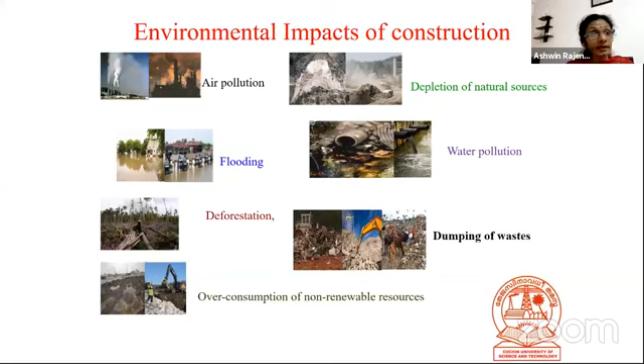So we know construction activities are really depleting our natural resources. So how can we connect sustainable development and construction activities? In other words, how can we make construction sustainable? When we know the implications of the cement industry, we need cement for all activities.

Actually, this cement, without cement, I could say it is a mandatory material for all types of activities. But the impacts of cement manufacture in construction is severe. So whenever we think about sustainable construction practices, the first point is we should be able to remove cement from the construction material. But can we think about that?

Without concrete, how can we construct? How will we be able to develop, how will we be able to proceed with infrastructure development without cement? We won't be able to think about that. But now the situation is like that, we have to think in that way. We need to think about research activities which can help us in eliminating cement or finding an alternative for cement. So that's the case with cement.

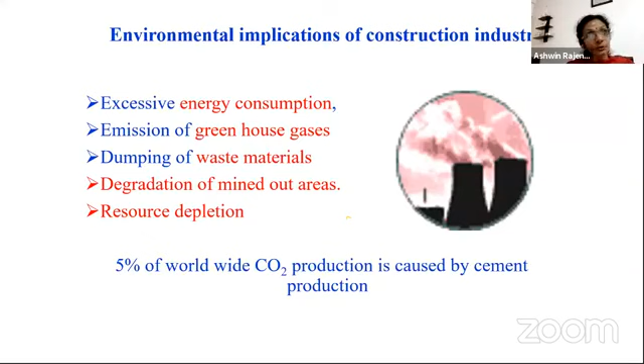Aggregates also the same thing. So we need to think about alternative materials. Then only we can achieve the objective of sustainable development.

We all know the basic meaning of sustainable development. The basic definition, even from childhood we are listening to this word sustainable development. Everyone is talking about sustainable development, and related to that, the green building concept also. Yesterday sir was saying the same thing. Are the green buildings sustainable? That's a big question, because whenever everyone talks about sustainable development, the next sentence is, oh, we need to practice green buildings. But we need to think...

...change our perspective with respect to the concept of green buildings. First I'll talk about sustainable buildings, then maybe we can talk a little bit about green buildings also. Sustainable development is actually a 3P concept: people, planet, and profit.

Whatever development we are doing, it is for the people, for the benefit of the people. So we have to think about the socio-cultural backgrounds of the people. Based on the socio-cultural backgrounds, only our needs are developed. So people is the first thing. Based on the interest of the people, everyone is doing development activities. Everywhere construction activities are going on. So first the aspect is people.

And the second aspect is we need to think about the environment. What is the significance of the environment? Whatever we need, we are achieving it. At the same time, our future generation should also be able to meet their needs. So whatever development activity we are doing, we have to think about the environment, to preserve the resources without creating any impacts on it, and preserve these resources for our future generations.

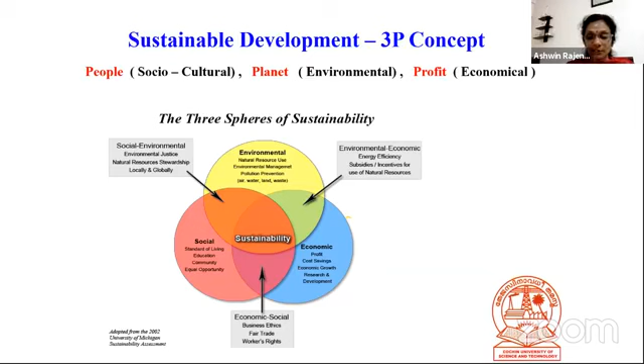Then what about our construction activities? How are construction activities related to sustainable development? Construction activities, anyway, we need resources. So we have to think about whatever construction we are doing, we should be able to reduce the implications of the construction without utilizing the resources. We won't be able to say like that, minimizing the usage of resources.

Based on the concept of sustainable development, we can give a definition for sustainable construction. Along with the case of sustainable development, one more P is added: people, planet, profit, and one more P. Maybe we can consider it as project. Project means actually technological options. Construction needs technology. So the fourth P corresponds to the technological option.

So we can see the definition. Sustainable construction is a technological practice that involves the effective utilization of local manpower and indigenous methods. Local manpower and indigenous methods definitely connect with people and technology, and also local resources, utilizing renewable resources and waste materials. There comes the significance of the planet, with minimum infrastructure and feasible technological options. Again, that feasibility corresponds to profit, economical, affordable options. So all 4 P's are related to this concept of sustainable construction.

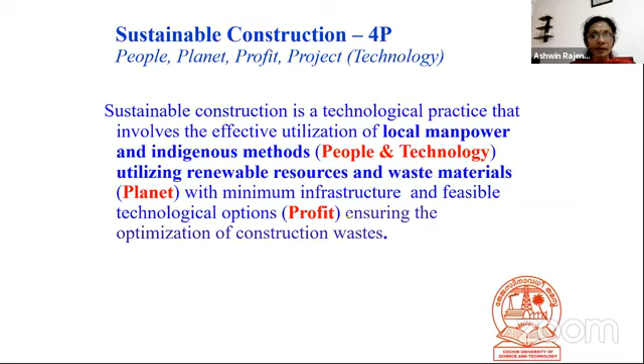If we understand the concept of sustainable construction, we should be able to evaluate present practices with respect to this concept. So how can we evaluate? In this presentation, I won't be able to show the entire evaluation, but I'll show you the results of evaluation of construction practices in Kerala.

For this evaluation, we have made a kind of framework, known as a simple conceptual framework for the evaluation. Our main objective is achieving sustainable construction, so for that we have sub-objectives, the 4 P's. Each P is related to each aspect of sustainability.

Socio-cultural aspects are based on the interest of the people. With respect to socio-cultural aspects, if we propose a particular technological option, how can we adopt that? I should have awareness about the technology, and based on that awareness, acceptance for the technological option will develop. So acceptance and awareness are important factors with respect to the socio-cultural sustainability of construction. Also, it should enable self-help or decentralized production.

For example, if I give you a technological option and say this is environment friendly and cost effective, you can adopt it. But if you are not able to access infrastructure facilities and implement that technology by your own, then that particular technology won't be sustainable. So enabling self-help is important, along with infrastructure facility, which adds to the economic sustainability of the technological option. Labor requirement and material requirement also contribute to economic sustainability.

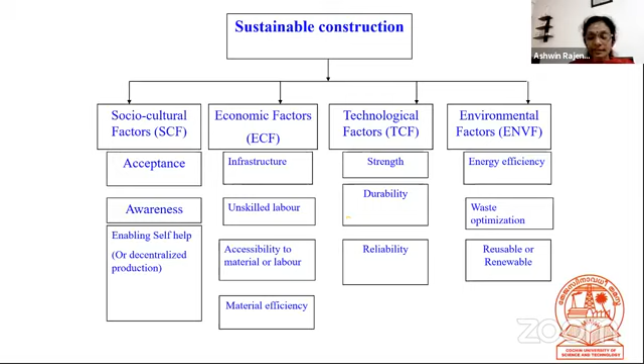This was part of a study I did very early, in 2006, during my PhD. I'll just show the results of the options. Now coming to construction practices in Kerala, we can start from the very early stage: traditional construction, the age-old traditional construction in Kerala that we all know.

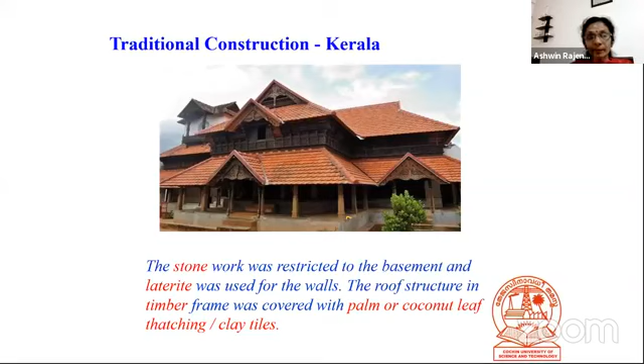But we are not sure why this technological practice is not popular even nowadays. After how many years? After the 80s, means 40 years later, now I don't think that many of us are practicing this. Even Kerala State Nirmithi Kendra, they are also not practicing it very much. What are the reasons behind the failure of this technology?

So the CEF technology options are basic characteristics characterized by exposed brickworks, usually rat-trap bond or Flemish bond, filler slab roof, precast lintels. Instead of conventional openings, they have jolly works, corbelled arches, and natural ventilation in the room is facilitated through honeycomb brickwork. So this is the basic characteristic of a CEF technological option.

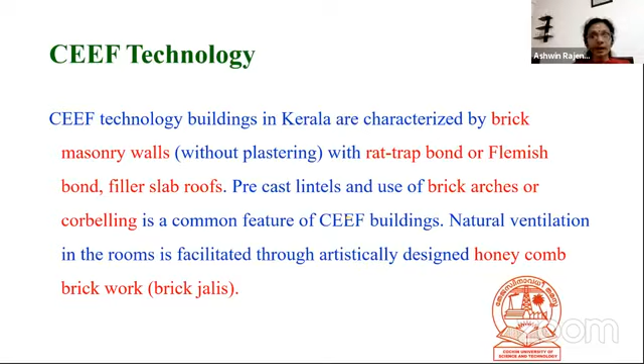And we have many CEEF technological buildings around us also, but nowadays it's very difficult to see new construction like this. These are all earlier constructions. In public buildings, residential buildings, school buildings, everywhere we used to see this in the 80s and 90s. But nowadays, I don't think it's that popular. So these are some examples.

Why are we not able to accept such a technology, even though there is aesthetic appearance, even though there is cost-effectiveness and environment-friendliness in the sense that we are able to reduce the usage of resources? But still, why is the acceptance part or the awareness part lacking? We need to do a search on that. We should actually need to overcome all the drawbacks, and we should be able to propose sustainable options.

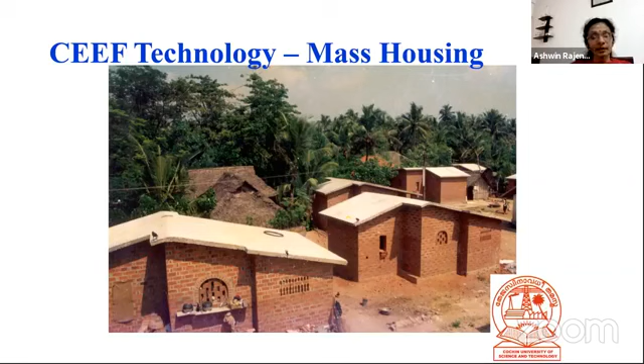CEEF technology, one more public building. Mass housing also - Nirmithi Kendra was able to construct and propagate many projects in all these areas.

Now we can see what are the, maybe we'll be able to do an evaluation of the CEEF technological options against, I would say, traditional construction and conventional construction. Actually, I'm doing it together because nowadays we won't be able to see any traditional type of construction. What we see at present around us are only conventional options. So we'll do it together: CEEF technological option versus conventional or traditional technological options.

What are the advantages of this CEEF technology? From the name itself it is clear: cost-effective and environment-friendly technology. So in the 4P concept of sustainable technological options, we can take two terms: economy and environment. Definitely both of these options, technology is the common factor. Technological, so we can assume that strength and durability characteristics are there. Actually, it is there - even in CEEF technology and traditional or conventional technological options, all these are accepted by the standards.

So basic strength and durability characteristics are there. So we need to conduct an evaluation based on other pieces, like economical aspects and environmental aspects. Actually, with respect to CEEF technology, the main objective of the technology is on those two pieces only: economy and environment. But with respect to the traditional conventional options, the main advantage is accessibility. Whatever material we need with respect to this conventional option, we can directly go to the market and approach it. It is easily accessible - that is the basic advantage of conventional options.

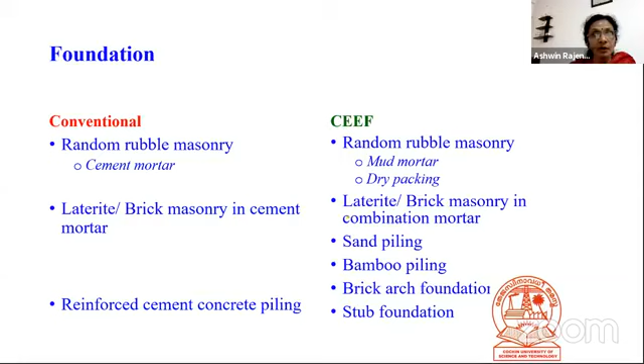Another option in CEEF technology is ground improvement techniques. Rather than going for deep foundations, we can go for ground improvement techniques and adopt feasible technological options that are environment friendly.

This is with bamboo, how they are utilizing bamboo for ground improvement.

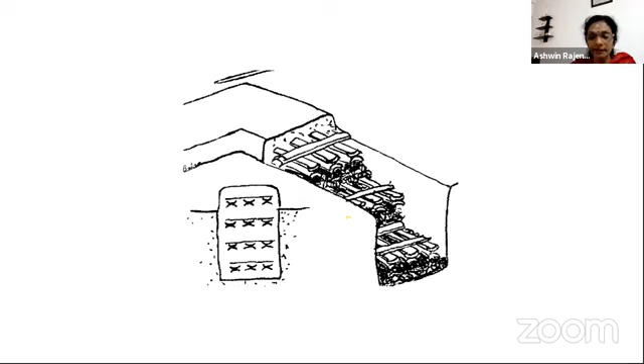Now coming to the case of the superstructure. Under superstructure we have the walls, openings, lintel, beam, sunshade, everything. Conventionally or traditionally, whatever was locally available was our concept in traditional construction. That's the reason in traditional construction mostly we were using timber or laterite. In our traditional Nalukettu, Ettukettu, we could see timber, wooden type of construction.

But conventionally around us, what we see now are bricks and concrete blocks. Laterite is also a naturally available material; we are cutting the laterite blocks from the surroundings. But laterite is not used much nowadays because of its inferior weathering resistance. That's an issue related with laterite. Laterite was used in our traditional construction too, but mostly nowadays around us, the conventional practice is using concrete blocks and bricks, the common burnt clay bricks.

But what about CEEF technology? Actually, CEEF technology options are proposed, especially for walls, with the objective of improving the traditional options we were practicing in olden days, like mud blocks. Mud blocks are an improvement of adobe - stabilized mud blocks, I should say, not simply mud blocks. Stabilizing the mud blocks for improving their characteristics.

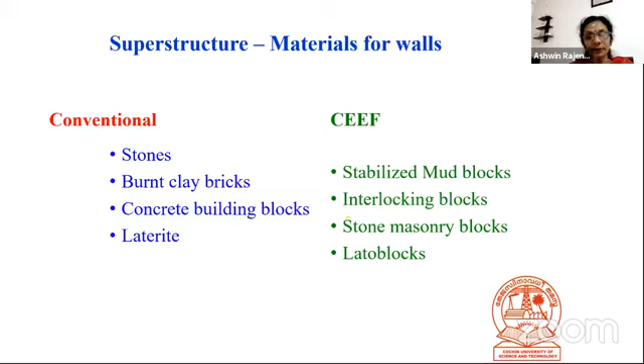Engineering students, technical students and other academicians - we are academicians, we are not able to practice it. But other stakeholders, why are they not using it? We have to see some changes in the policy.

Now coming to the walls - first we discussed about the foundation, then under the superstructure we were discussing about the masonry units. Now with respect to the bonding, conventionally we use - when we look around, they are using brick masonry plastered on both sides, and for that plastering we use English bond with cement plastering.

But for CEEF technology options, if they are going for brick, they use either Flemish bond with cement pointing where plastering is avoided, or rat-trap bond. Actually this rat-trap bond and Flemish bond, when we compare the labor requirement with respect to skilled labor, it is a bit higher compared with the English bond.

So that can be a reason for the low acceptance or inferiority of - I don't know what should I say - maybe for propagating this, it can be considered as the main hindrance in propagating this type of technology, even though the exposed brickwork has such a good appearance. Why are people not adopting it? We have to think about that.

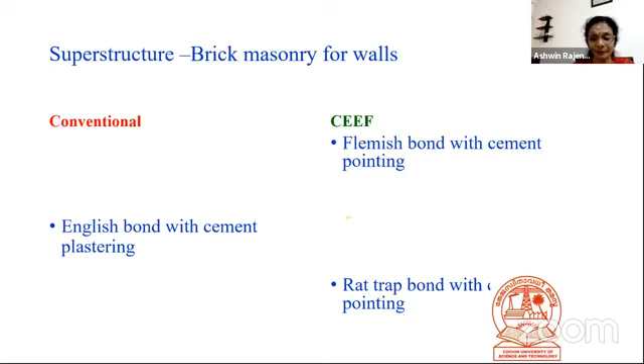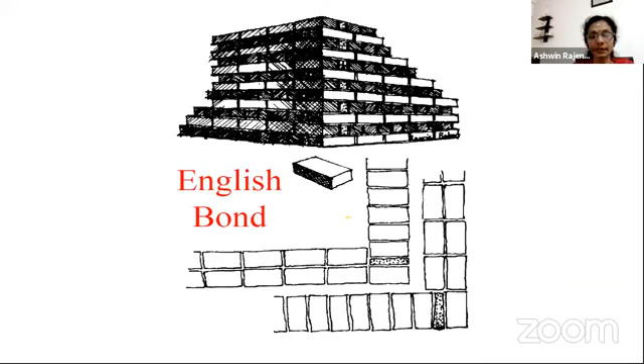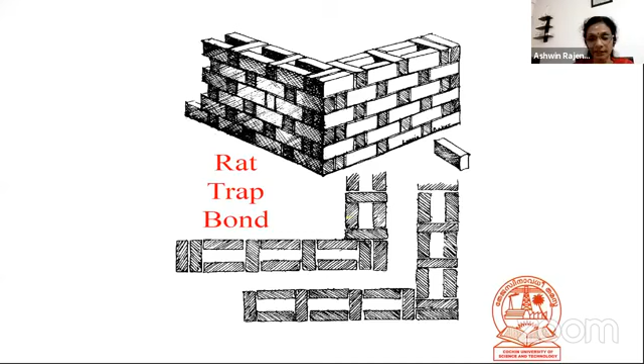Rat trap bond construction - I don't think I need to explain it since most of you know about these technological options. Just showing it to get an idea about the results. We did an evaluation, I'll show you the results.

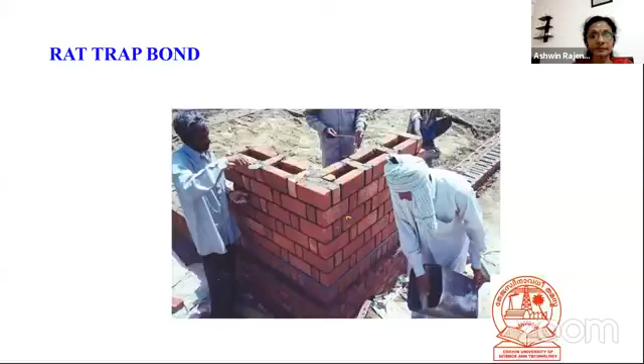Under superstructure, we have the next element - lintel beams. Usually in conventional options, we go for lintels. Traditionally we were using stone lintels, wooden lintels, all those things - traditionally we could see it in palaces and temples. But nowadays we can only think about RCC lintels throughout the building - we construct it around the walls, we only use RCC lintels.

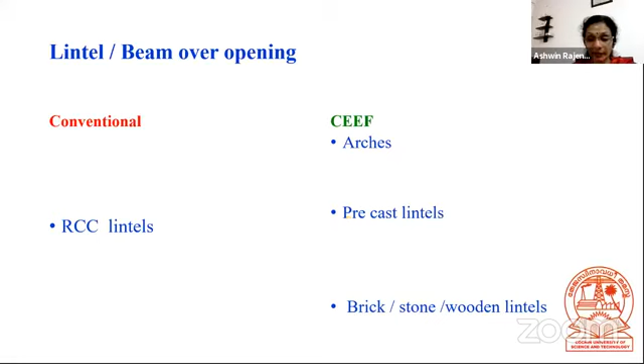But CEEF technology options use arches, precast lintels, and they also use stone lintels or wooden lintels as earlier used in traditional buildings. This is a corbelled arch - these are pictures of different types of arches. The aesthetic appearance of the arches is very good compared with RCC lintels.

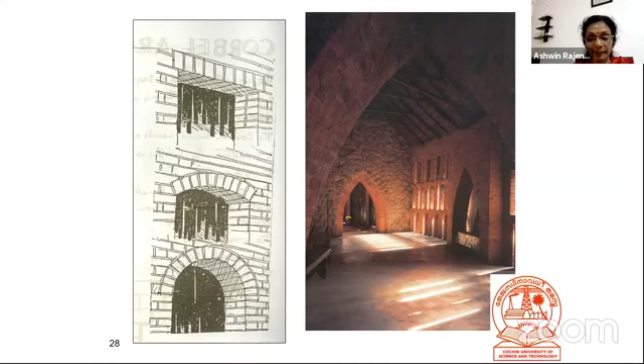Material efficiency is there - in the case of normal lintels we need to use steel reinforcements, but in this case we don't need it. Comparing material requirement, energy requirement, embodied energy of materials, especially with respect to material efficiency, arches are the sustainable option. But the problem is with labor requirement - it is very high compared with the other option.

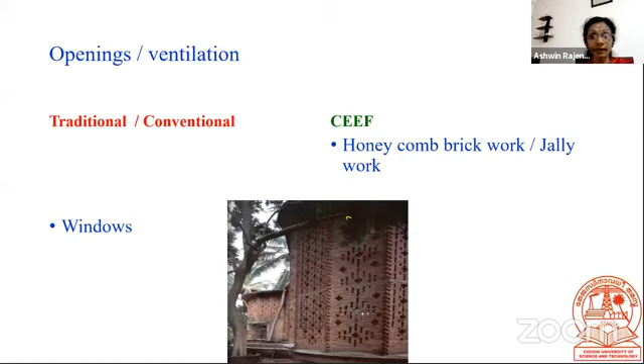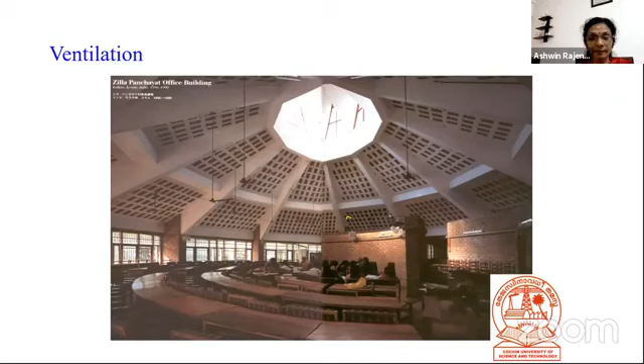Now coming to ventilation - openings and ventilation. Usually for openings we go for normal types of windows, but this is a peculiarity of CEEF buildings - we can see honeycomb brickwork, jali work for natural ventilation. This is a picture where we can see the natural ventilation, how it is provided - this is a picture from the CEEF technology building.

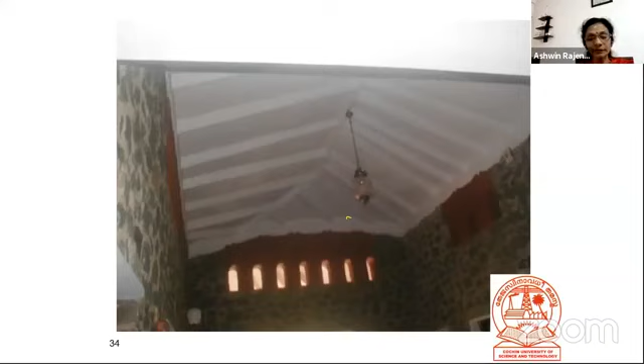And here also there's an auditorium, showing how they get natural ventilation utilizing this honeycomb brickwork or jali works. Yesterday's presentation also showed pictures of different types of jali works. This is also a picture from a residential building showing how they get natural ventilation.

Now coming to the roofing. In roofing option, we have only one option when we think about the material. If we see the census reports, we can see the practice of materials changing every 10 years.

We won't be able to see any thatched roof or even tile roof in the recent census report. In early days, most buildings used only tile roof, but now, if you are able to see a tile roof at all, the tiles are just placed over RCC roofing to get that aesthetic appearance or to protect it from leakage. That's why tile roofing is provided now. Otherwise, everyone is going for RCC roofing.

So you can imagine how much wastage of material is there. We are utilizing reinforced cement concrete for the roofing, and over the RCC roofing, we are again placing tiles - how much material is wasted in that case. But in our traditional construction, we were using timber frames, and over the timber frames, we were using tile roofing.

I'm not arguing for going back to those olden days where we need to use palm leaves or thatch roofs. I'm not saying like that. We have to think about alternative options that can reduce these environmental implications of resource depletion.

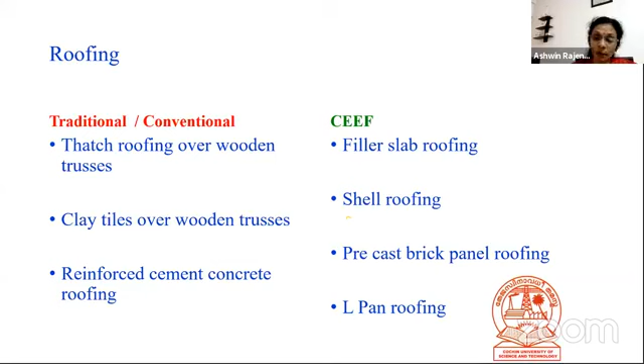In the case of CEEF technology, we have filler slab roofing, shell roofing, precast brick panel roofing, and L-pan roofing. Most of you may be aware of filler slab roofing, but what about the other options? All these technological options are already proven, but still we are not using them.

This is a filler slab roofing. Below the neutral axis, the concrete is actually not required - in that position we have only tensile stress, and we provide reinforcement to take the tensile stress. In that case, the concrete is only acting as a filler material. So we can replace the filler material by utilizing any locally available material.

Most commonly, most popularly, we used to see Mangalore pattern tiles placed in such a way that an air gap is created between two tiles, creating thermal comfort inside the building. Instead of these MP tiles, we can use coconut shells.

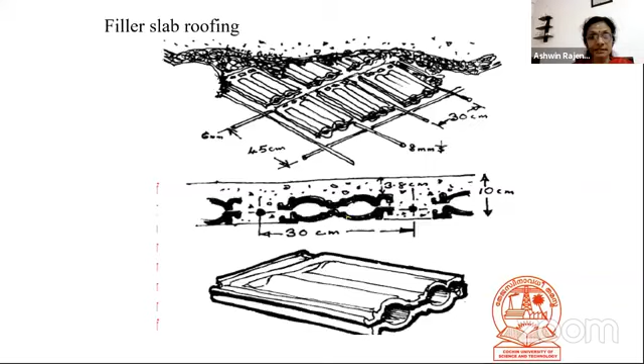In yesterday's presentation, we have seen the stabilized mud blocks made for use as filler material for slabs also. So we have many options that can be utilized. I should say that we should go for locally available options if we are thinking about environment friendliness and sustainability. This also is a picture of roofing.

I hope I was able to cover all the technological options. Actually, these options I had shown just before showing the results.

We are actually evaluating the technology with respect to 4 P's, like people - socio-cultural factors, interest of the people, acceptance of the people, awareness. If I'm interested about a particular technology, then only I will accept it. If I have awareness of a particular option, then only I'll buy that one.

For example, our mobile phone also - we have many options around us. Before buying a particular phone, we should check all the specifications and all those things; without that, we won't adopt it. The same thing applies with respect to our construction technology also.

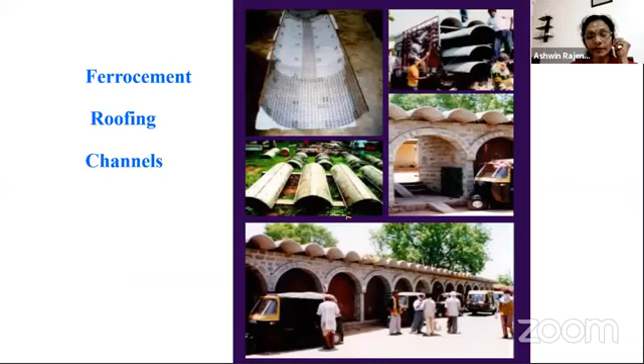In this case, we don't have much options available for getting awareness on these technological options, even though they are available. I should say policy intervention should come for propagating this technological option. Before going to the results, I'll show one more evaluation. Under roofing option, ferrocement roofing channels are also an innovative option.

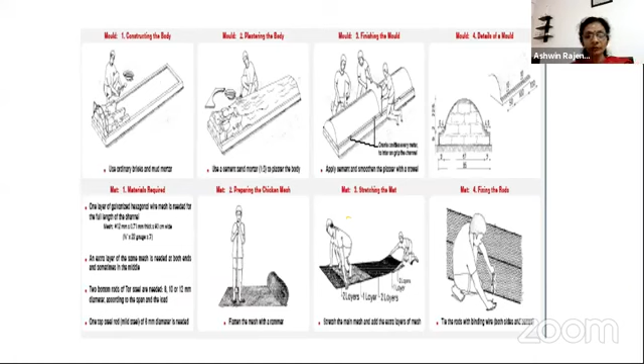Maybe I'll just explain with this. Some more slides are actually missing in this. Before coming to this slide, I need to show you one more slide regarding the evaluation of the technology based on embodied energy also. Actually, those slides are missing. Unfortunately, I had some issue with my system and I changed it, and this is my son's system, so I think it's a different presentation.

Yeah, anyway, I'll proceed with this.

With respect to the evaluation, why do CEEF technology options fail? What are the reasons for the failure? From the evaluation, we could understand that it is the poor acceptance among the public. That means when we compare the 4 P's: socio-cultural aspects, economy aspects, environmental aspects, and technology.

Economy and environment, those are the basic concepts of CEEF technology options. With respect to technology, it is already proven in strength and durability. But who should accept that? The public, they don't have any awareness about this new technological option introduced.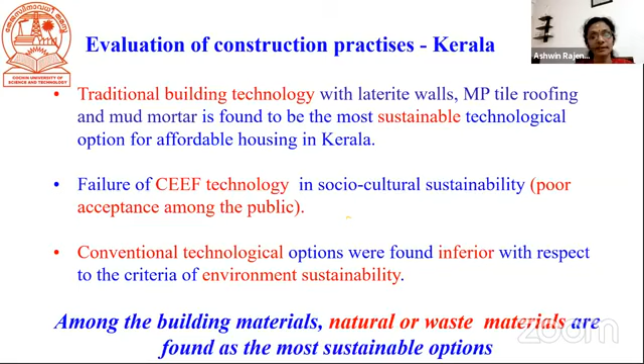So there are some options based on this evaluation under building blocks or masonry units. When we think about natural materials or waste materials, we need researchers helping to propagate this technology. Bamboo construction is there, and there are many researchers working on it. The only thing is that we should be able to propagate this technology.

Under mud construction, we have the traditional options. What we need to do at present is work further on this mud construction technology to improve its durability characteristics.

And another innovative option is straw bale technology. I'll come to that in detail. In the coming slides, I'll show the works of some of my students who are actually working on this. And concrete building blocks, that is the popular option available around us.

When we think about the construction of a building, the first option coming for wall is brick. If we want to reduce the cost, the next option is concrete blocks. So around us, whenever we think about constructing a building with the concept of reducing cost, naturally we go for concrete block construction.

But the inferiority of concrete blocks is that there is competition among manufacturers, so they want to reduce the cost. How can they reduce the cost? They will reduce the content of cement. Naturally, the quality is less, and they are not sure about the codes.

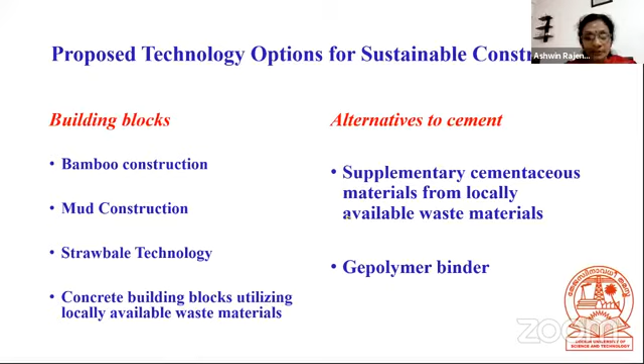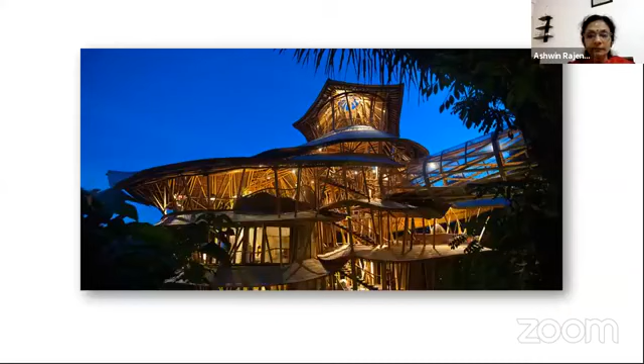This picture shows how it can be utilized for the walls. And this also shows different applications of bamboo as the roof. This is a bamboo building with roofing, pillars, columns, even the walls, and flooring is also made of bamboo. Bamboo flooring again.

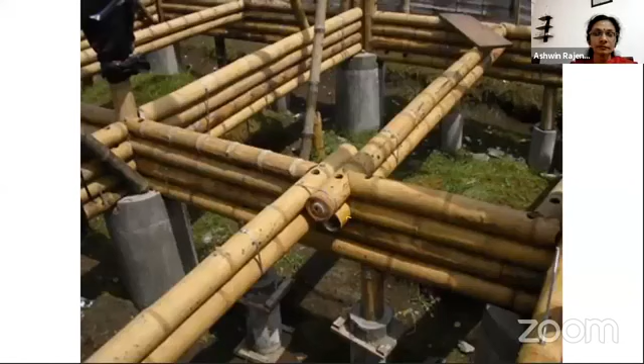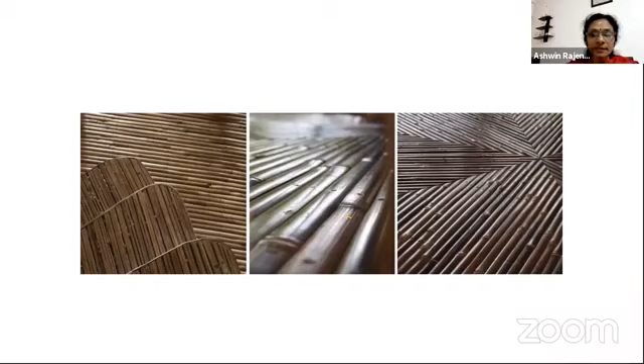You can see clearly from the picture how bamboo is utilized as a plinth beam. Again showing the picture, these are the different utilizations of bamboo. Bamboo is used in walling and even in the case of doors.

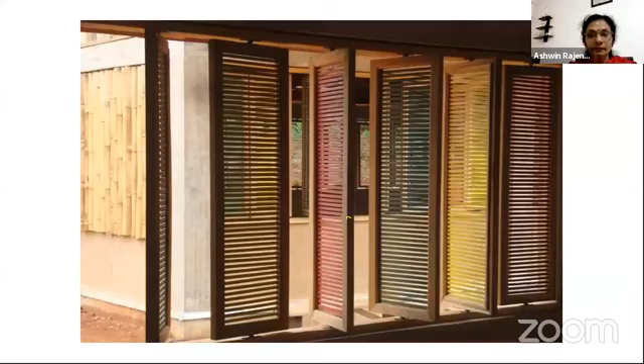Now the other option - this is the traditional option we used in mud construction. So we are talking about masonry units where we can utilize natural materials. First option, timber, we can go for bamboo. Another natural material, mud, is locally available. Even when we go for earthwork excavation for constructing a building, the excavated soil from that pit can be used for mud construction. What we need to do is check the property of the soil collected from that excavation.

First we need to do the grading for different particle sizes, and then we need to think about the stabilizers. Then only we can go for stabilized mud blocks or the suitable type of construction using mud. From the very old days, traditional construction used adobe, cob, wattle and daub, rammed earth. All these things Sir was explaining yesterday. I'm not going into the details, just showing you the options - these are the traditional options.

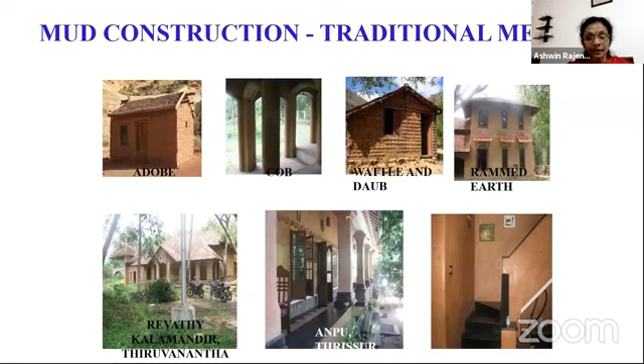Now the third option, also an ongoing research of one of my students, is fiber reinforced lateritic blocks. Earlier I was explaining about Lato blocks. Laterite is having some drawbacks - it is naturally available, we can cut laterite blocks and use them as masonry units for construction, but it has low weathering resistance. That's the basic problem of laterite block.

In the case of Lato block developed by SERC, they mix the lateritic soil with cement or lime based on the property, based on the clay content of the soil. Either cement or lime is decided and used as a stabilizer - if clay content is more, we go for lime. Naturally available soil is collected, then after checking the gradation of the soil, percentage of clay, sand, silt, we decide on the stabilization material, either cement or lime - I'm talking about the Lato block. So soil plus binder, and then they go for curing, 150 degrees Celsius steam curing. Compared with the burnt clay brick, that is advantageous - we are using only 150 degrees steam curing, but still in that case we are utilizing energy.

With respect to energy consumption, it is not that sustainable. So in this particular research, that student was working on improving the properties of lateritic soil using stabilizers. He was using binders like cement or lime, and quarry dust and sand as stabilizers, depending upon the gradation of the soil particle. These are the basic stabilizers, needed further to improve ductility and strength characteristics.

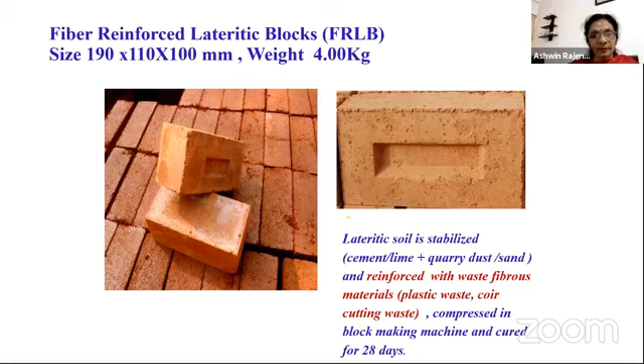This particular block has sufficient strength with respect to load bearing masonry, even without stabilization at maximum strength. He was actually checking with 3 different types of soil around our campus, considering locally available soil within around a 30 kilometer radius of the Cochin University campus, collecting samples and checking the possibility of different types of stabilizers. So this one is the fiber reinforced lateritic block.

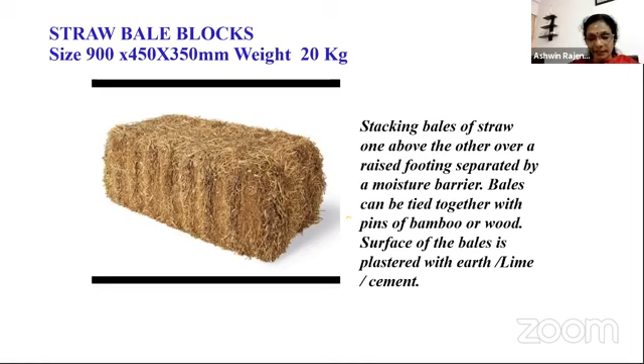Yeah, this is another option, the straw bale block. I'll come to that in detail later. Yeah, this is the other, second option.

Actually, when we are thinking about utilization of waste materials, we have to think about reducing conventional materials. So this is an option: replacing the fine aggregates. Not completely replacing the fine aggregate, but partially replacing it with locally available waste. This also is part of the PhD work done by another student, who utilized 4 different materials - the same thing local manufacturers are doing without any scientific know-how, utilizing quarry waste. So how can we improve the strength by utilizing quarry waste?

One more different type of waste, fly ash, was also used as a replacement for fine aggregate. Lateritic waste is actually waste from demolished buildings. And Jarrofix - earlier we were getting Jarrofix from Binani Zinc, but now Binani Zinc is closed and we are not getting Jarrofix. It is a waste material from zinc manufacturing industries.

But this Jarrofix is plenty available in India and around the world also. So fly ash and Jarrofix were selected with the perspective of plenty available waste material, laterite waste is demolition waste collected from buildings, and quarry waste is collected with the perspective that this is the common waste everyone is using.

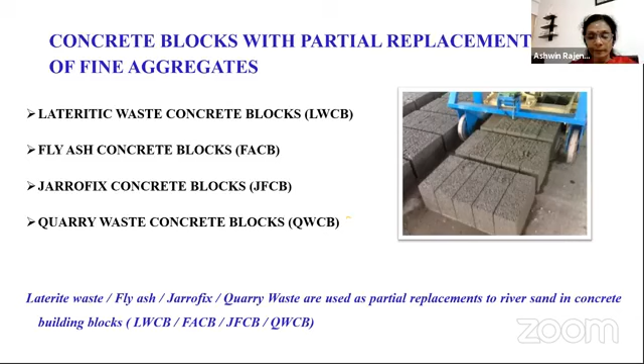So we need to check the strength and improve it. By utilizing these materials, 30% of the fine aggregate replacement was possible without compromising strength and durability characteristics, and at the same time achieving higher durability characteristics. So that was an advantage - we were able to save fine aggregate by utilizing these waste materials.

Now this is another option: to replace cement by utilizing supplementary cementitious materials. These are also part of PhD works. The first student was utilizing roof tile powder as a supplementary material - roof tile meaning the clay tile, the common MB tiles we used to see around us. We get the waste material from demolished buildings, and also from tile factories where in the premises we get many unburned tile pieces and similar waste.

She has collected the material from the tile factory, and after grinding it into fine powder and mixing it with cement, there's a replacement of 20%. Even 20% replacement is a very good achievement, because we can save that much cement, meaning it is a sustainable option, because manufacturing 1 kilogram of cement itself produces 1 kilogram of carbon dioxide. So every saving in cement points towards sustainability.

In the second option, rice husk ash was utilized as a cement replacement. This is also an innovative option, especially with respect to Kerala. We need to propagate paddy cultivation because we are seeing that our paddy cultivation is declining. Whenever I propose this option of rice husk ash, the usual question I get from the public is that rice is not available, paddy is not available, so where do you get this rice husk ash? But it's not like that. We have to think of it in a holistic manner. Whatever we are proposing, we should be able to think with respect to all the concepts. This is an option—maybe we can propagate in that way for improving paddy cultivation.

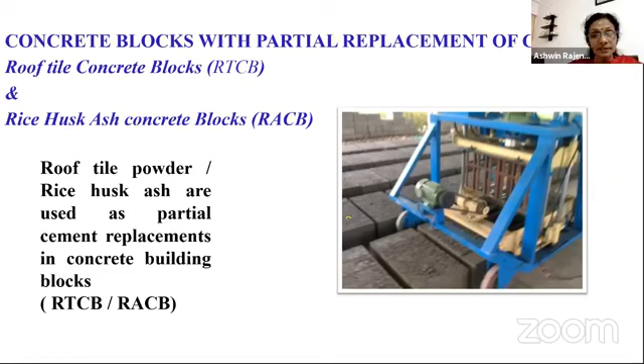So these are the options regarding sustainable technological options utilizing waste materials, alternative materials to cement and aggregate—meaning partially replacing cement and partially replacing aggregate. Now the most important option: completely replacing cement.

This is geopolymer. Geopolymer can completely replace cement. Alkali solution is added to dry mixed ingredients. Usually for the source material, silica and alumina should be present. Clay tile waste, as I mentioned earlier, is used as pozzolana because it is silica rich, has alumina, and has iron content. Such waste materials, having silica and alumina content in higher percentages, can be utilized as a source material for geopolymer.

A diluted alkali solution is mixed with this, usually sodium hydroxide or potassium hydroxide. The mixture is pressed in a block making machine and cured at room temperature. Sometimes certain types of waste materials are used as source material for geopolymer—for example, fly ash is also used as a source material. Ambient curing won't give significant results in that case; we should go for accelerated curing, 60 degrees Celsius or 80 degrees Celsius for 24 hours or 12 hours. But for this clay tile waste, ambient curing was possible, so definitely we can suggest it for normal manufacture of geopolymer blocks. These are some of the researchers.

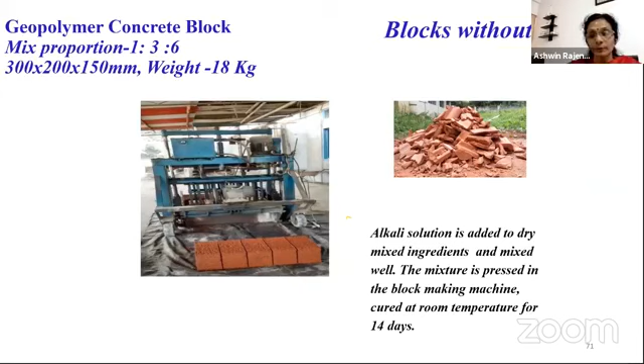Now, this is another option. Actually, this is not an innovative option—it is already being practiced in different parts of the world, just not introduced in Kerala. In most of my presentations, I used to propagate this particular technology, but unfortunately I was not able to implement or prove this technology in our environment. The research is ongoing. We have to think about this option. Earlier I told you about rice husk ash; now straw bale is another option, also from the paddy fields.

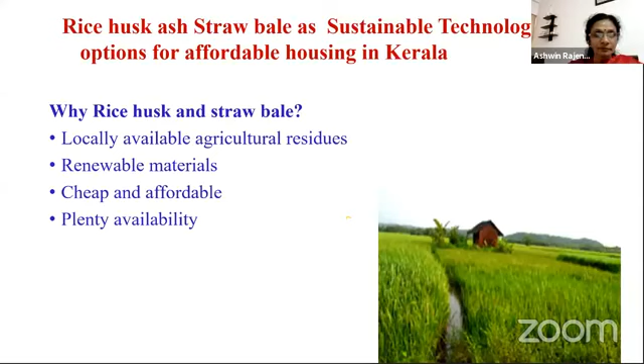We all know what straw is—straw is the stem part of the paddy. Actually, the leafy part we use for cattle feed, and the stem part of the paddy we usually burn in the field itself. After harvesting, we burn the paddy stem or straw in the field and just dispose of it as such. But if you are able to cut the stem part of the paddy, we can make it into a bale form.

Yeah, I'll show you the slide.

Bale form means the form of a big block. Usually these baling machines are available in Kerala also, in the northern part, in Palakkad and Thrissur. I'm not sure about the southern parts. They are using the baling machines for transporting the straw. But most places have only cylindrical molds, so it will be in the shape of a cylinder. Maybe most of you have seen it in that form. But for straw bale technology, if you want to use it as masonry, we need to make it in the form of a block-like shape, a bigger rectangular block.

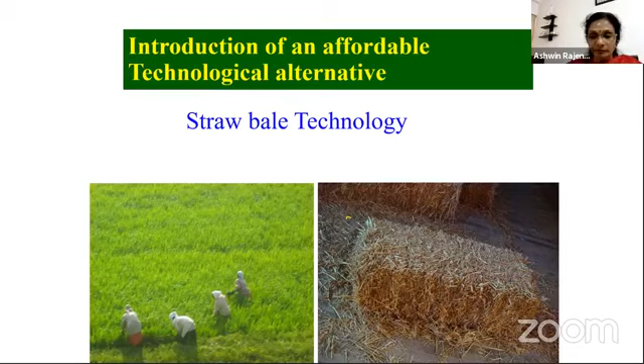So you can utilize it as a wall system in which bales of straw are stacked up. Sorry, one minute.

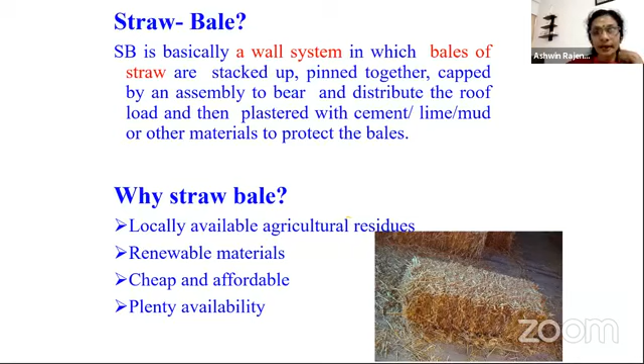So these bales of straw, I'll show you the picture of the straw bales. They are pinned together, capped by an assembly to distribute the roof load, and then plastered. So this is the picture, you can see it from the figure itself. Just like our brick masonry wall, one bale is kept above the other, but not exactly like brick masonry walls. We are not able to keep any mortar in between. Instead, we have to pin it together in between the straw bales.

Some in the European countries are actually using bamboo or some other wooden material, pierced through the straw bales, and they will be capped by a wooden beam. You can see it in the picture also, they are placing a wooden truss over that. So the wooden beam acts as a cap, and over that the roof truss is placed and the roofing is provided. So there are different methods.

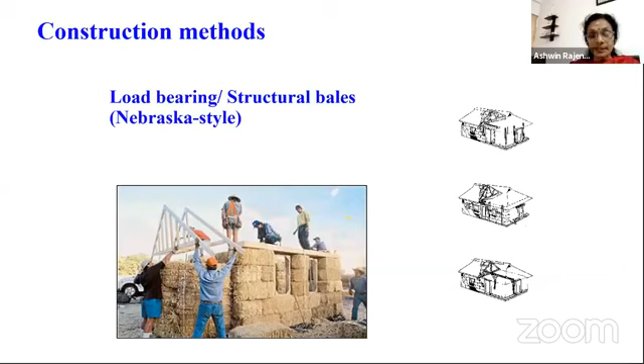Here in the picture, you can see it as a load-bearing masonry. And like a non-load-bearing masonry, like the post and beam construction or frame construction, that type also we can use straw bale. It's clear from the picture - the columns and the beam are there, everything made of wood only. And then in between the columns, the straw bales are kept, tied up together, and then plastered.

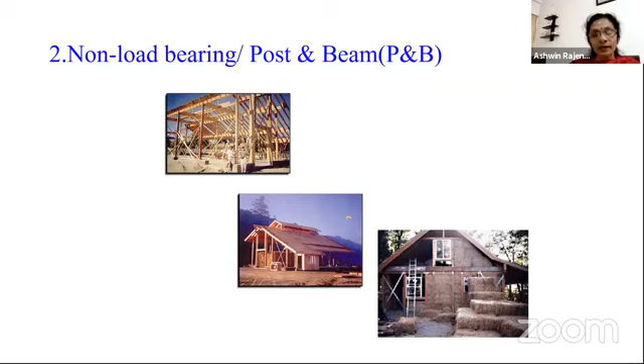But the important thing with respect to Kerala is whether it is suitable to our conditions. Because of the humidity, we have to check the suitability, need to do research after keeping it under sun for different seasons, and then only we can check the suitability of this material in Kerala condition.

This is also a prefabricated option, the ModCell panel. It is a prefabricated option from this straw bale. So we can make it as a prefabricated unit and then transport it to the site and construct the building, rather than keeping it at the site and placing one above the other, because we have a security issue in that case. Straw is easily burnt off if there is a flame or something like that.

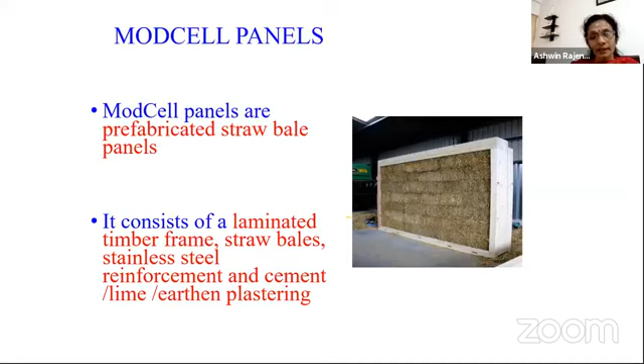There are many issues - if rain is there, then also the entire thing will be ruined. But if you are thinking about a ModCell panel, we can fabricate it in the factory and then transport it and place it.

So there will be a frame, a laminated timber frame, and in between the timber frame the straw bales are placed and then plastering is done. Actually, lime is more suitable in this case. Whatever is naturally available is more suitable. Lime or mud or a combination with pozzolana is commonly used in the case of straw bale.

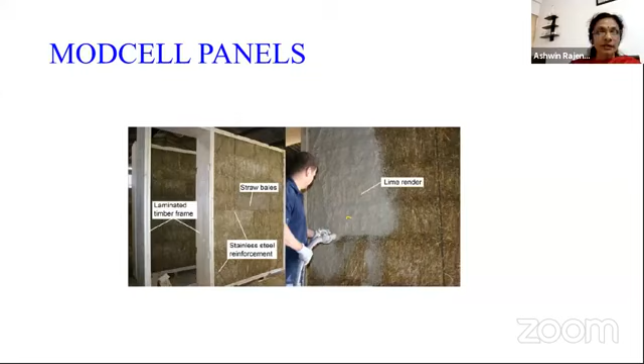Yeah, this is also a picture showing the details. So this will give you an idea about how the frame is made in the case of ModCell panels.

12 mm diameter - actually they are using reinforcement in this particular design. This work was actually done by my BTech student. They were doing it for their BTech project, and they were using reinforcement bars. But I don't think the reinforcement bars are working well. We have to use natural materials like bamboo for making the panels.

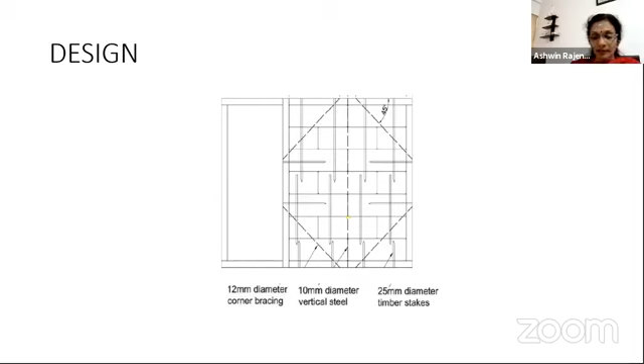Other straw building techniques include straw clay building, which is already available everywhere. In our traditional building we were also mixing straw with clay for construction. Mortared bales are another option, but not advisable. If going for straw bale construction, we should go for post and beam construction or load bearing construction, and pressed straw panels which are the ModCell panels.

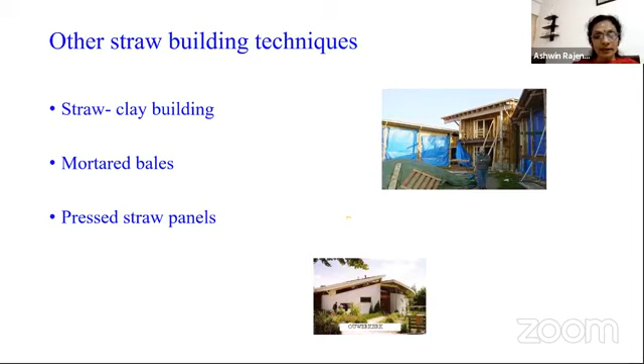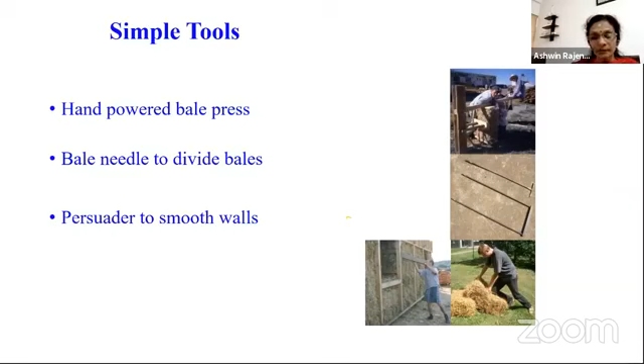Here are examples. The advantage is that after constructing and plastering, we are not able to identify the material, what type of material it is. We won't be able to differentiate it. The thickness will be a little higher compared to normal walls, so we may misunderstand it for rammed earth construction, because mostly the plastering is made of mud or natural materials, so we think we won't be able to identify the type of material inside.

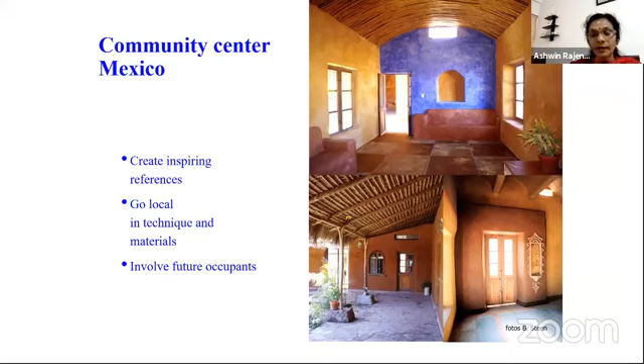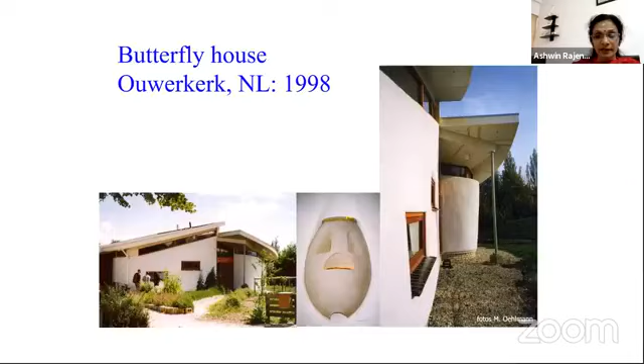This is also a picture. When we see this building we are not sure what type it is - we might think it's a brick building, but this is also made of straw bale only. They built this building in the shape of a butterfly, so they call it the butterfly building. I did a visit in 2006 and saw it. These are different views of that building.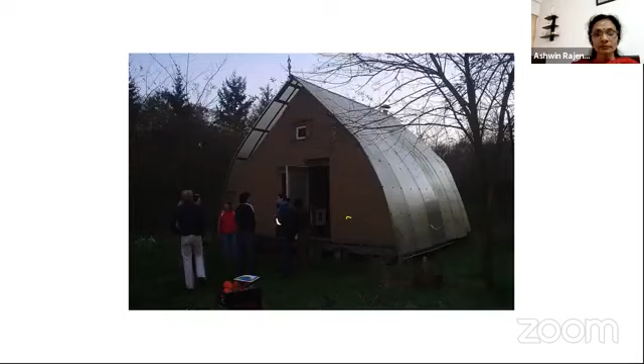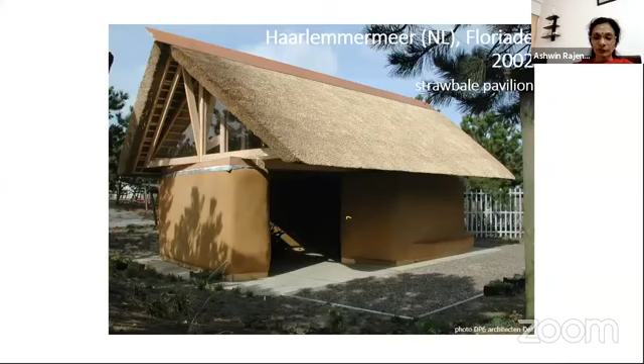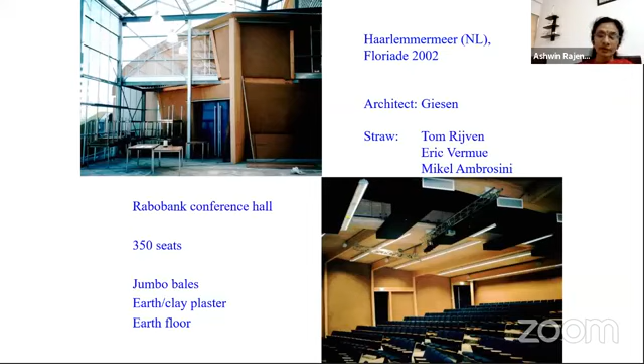This is another building made of straw - the entire wall, roof, everything made of straw. This is also an example from straw bale construction from Netherlands itself, with thatch roofing - straw is used for the roofing. Even for bigger buildings like conference halls, we can utilize this concept of straw bale technology.

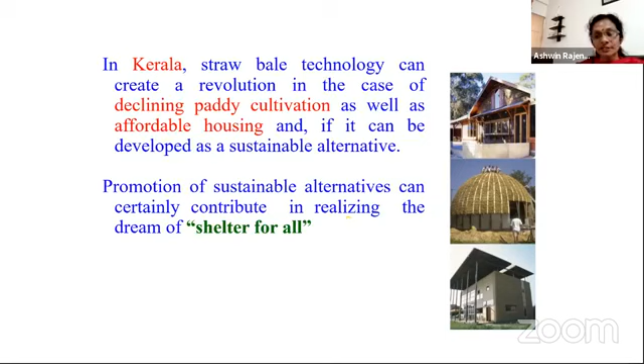I would like to conclude. With respect to rice husk ash and straw bale, those are the naturally available materials, and definitely further research is required on this. Otherwise, these are the best options with respect to Kerala. Even without straw bale, we can think about naturally available materials like improvisation of lateritic blocks through laterite, fiber reinforced laterite blocks, stabilized mud blocks, improvising mud construction or traditional construction, and utilizing waste materials in conventional materials like concrete blocks, replacing cement and aggregates. Definitely we will be able to move towards sustainability and achieve our dream of shelter for all. Thank you.

Any questions from anywhere?